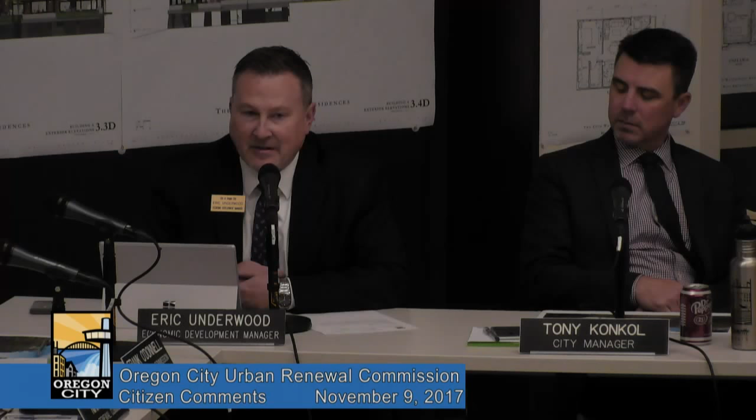All right, so Mr. Underwood? Okay, thank you, Chair Shaw. A new proposal for Phase 2 of the Cove project was submitted by the project developers to the Urban Renewal Commission in August of 2017. Upon the commission's initial review of the proposal, there were some additional questions that needed to be asked, and the commission directed staff to invite the project developers to give a detailed presentation. As per that direction, the project developers will be giving that presentation here tonight and will be available to answer any questions you might have. So with that, I would turn it over to them at this point.

All right, so we have a spokesperson for the project this evening. Name and where you're from, please. My name is Colin Kehoe, I'm with the development team, Hudson. Just want to thank you, commissioners, for giving us the opportunity to present our vision, our concept for Phase 2 of the Cove. City of residence for the record, please. Vancouver, Canada. All right, thank you.

Our basic intent is to provide quality rental apartments, which are in high demand in the market right now. These will be supported by a public plaza, a public esplanade, which is connected to a network of walking and bicycle trails. In addition, there'll be a public amphitheater in the North Park. There's a couple of things I wanted to say here. There'll be a broad range of units, including live-work units. They're all going to have one component which is secure underground parking, and all the buildings will have elevator access, secure again.

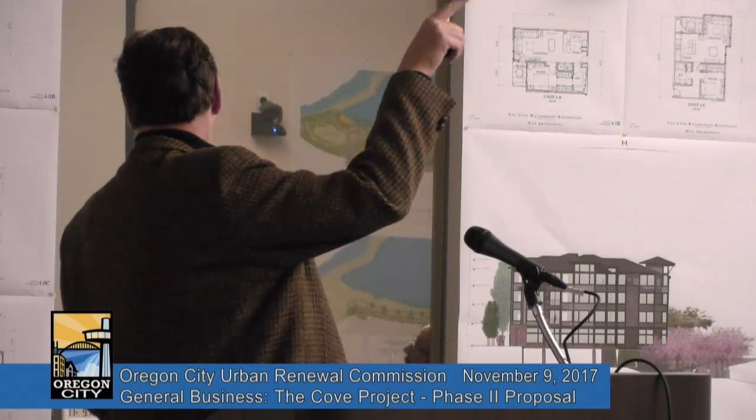Remember in the 60s, watching Star Trek, they would have those little panels that they would do stuff on. Do we need these lights left on? Is that good? Okay, no, we're fine. I'm fine. All right, good. Yep, okay, I don't have to take notes.

The Cove Waterfront Residences - we're at a point where we haven't really named the project or the buildings, so we've got some really exciting building names like A North, A South, B North, and B South. But I assure you that working with Graystar and the development team, some very interesting names will come up as we move forward. Maybe you could run that as a school project. We could, yeah, we could do a survey.

So this is our overall master plan for the project site. I think you're familiar with it. The phase 1 project here is under construction now. We're also the architects for that. We've been working with Grand Peaks Properties on that project - 244 units.

The first buildings are getting framed up to the roof now, and they'll be coming online next summer. You may wonder, gosh, 244 units is a lot—is it too much to do another almost 400 units next door?

These projects are differentiated. As Scott mentioned, the garden apartments are walk-ups with exterior stairs. These units are similar in size, some smaller, some bigger, but we have elevators, underground parking, and other amenities that phase 1 doesn't have.

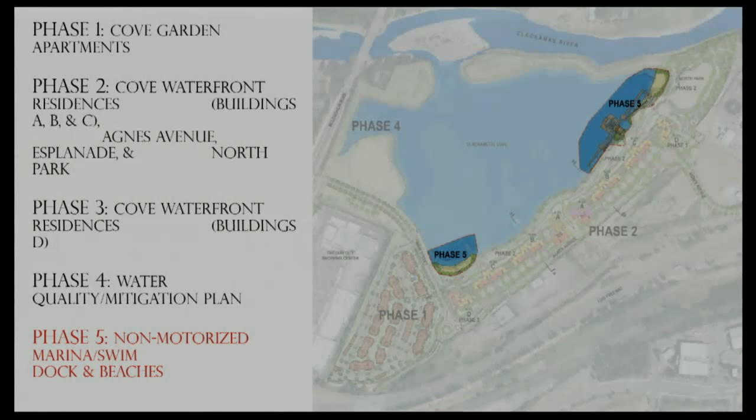Finally, phase 5 is at the north and south ends of the waterfront. We've dubbed there's a water sports center at the north end adjacent to the North Park. There are existing pilings in the water, and I think we can build the proposed docks with only a handful of new pilings, using the existing ones. There would be an observation platform—there's a big cluster of elevated pilings, so we proposed an observation platform a little above the Esplanade.

At the North Park, there's already an area excavated down just above mean high water, elevation 18 feet. To balance the cut and fill on the site, that'll be excavated a bit more, creating what we're calling the North Beach as part of phase 5—it'll be graded so there's a sandy beach going down into the water, which we understand is good for fish habitat.

At the south end of the site, there's a similar area we'll be excavating. One of the challenges on this site is balancing the floodplain—for every yard of dirt we bring in to fill in Agnes or fill in the parking lots in front of the building, we have to dig a hole just that big.

In earlier schemes, the plan was that any excess hole we couldn't dig on our site, we'd dig over on the Phase 4 site, as part of the water mitigation plan. But that creates phasing challenges—right now there's a parking lot there, and if we have to dig a big hole, we can't leave that temporary parking. So we've come up with a plan where we can build more parking there and leave it temporarily, then expand it during Phase 4.

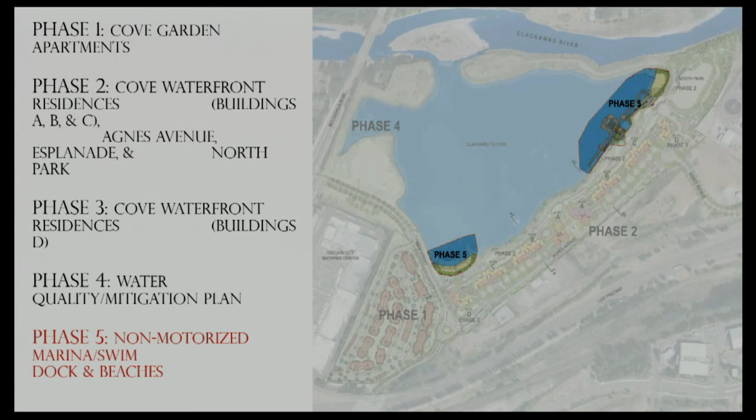And part of that is digging some more on this corner, which creates another beach opportunity, which we're dubbing South Beach. So now we have Miami covered, we've got North Beach and South Beach.

There'll be accessible pathways that lead down to these beaches that are flat enough, so you don't need handrails. They'll be handicap accessible, with sand that goes down into the water. Right now there's a path the triathletes use to get in and out, but it's not accessible and it's not the greatest. We're hoping there'll be kayaks, paddle boards, and other non-motorized watercraft using the water.

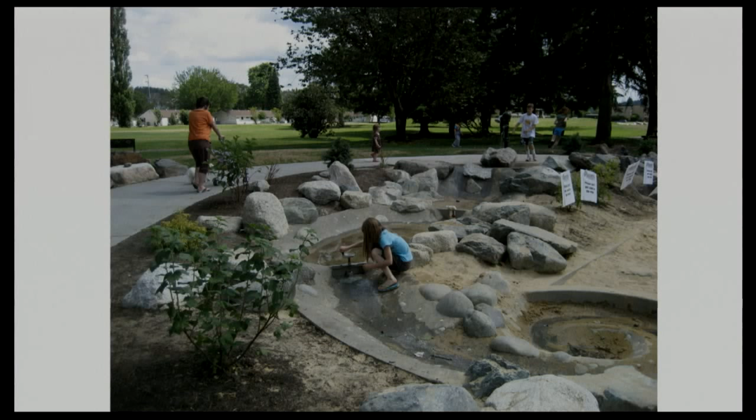There may also be, a very Portland thing, natural playgrounds. Without spending too much money, you can pile up some rocks and logs and things and end up with a really cool place for kids to play outside, and it might include a dry creek bed for the kids to play in, that sort of thing.

This would all be part of Phase 5. We're not doing it as part of Phase 2 because it gets into the water, and the permitting associated with it can be very difficult and time consuming, and we can't have that as a potential obstacle to moving forward with construction of Phase 2.

So here we are with the master plan, the big long master plan that was on the wall, that's about a half-mile long along the cove. We will enter from Main Street, either from Highway 99E or under the overpass here. This is where that curved wall with the sign will be, here.

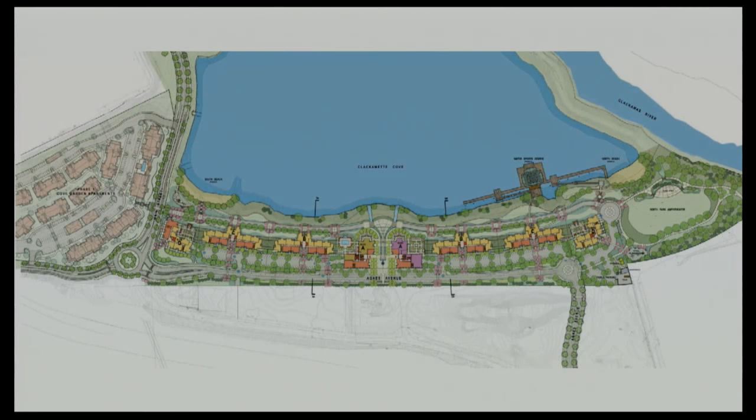The earlier designs really didn't have a concept figured out for the middle part of the site. As you may recall, there was a proposal to do commercial development in the middle part of the site, and there was also an agreement with Tri-Cities for a long-term lease for parking on the other side of Agnes. Well, one thing that's happened is Tri-Cities reconsidered that long-term lease, and they'll only do a 20-year lease, which just isn't a long enough commitment to allow for financing for a commercial project.

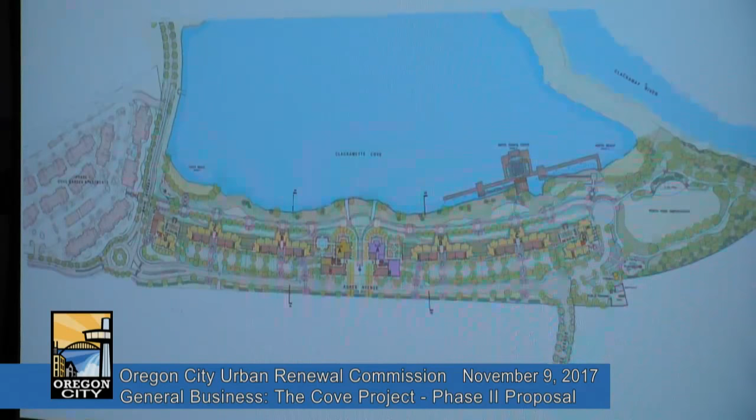So the development team has been forced to reassess doing just a commercial-only thing in the center here. And I think what we've come up with will be a wonderful amenity for the site. It will include restaurants, the outdoor plaza we talked about before, some retail—6,000, 7,000, 8,000 square feet—as well as community center facilities for the project itself.

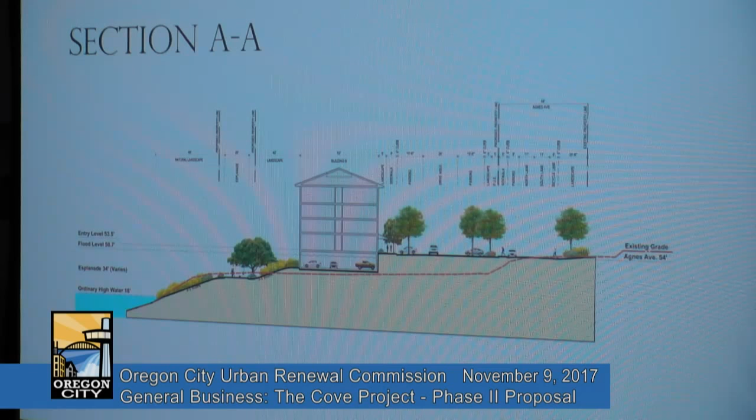So we talked before about the cut and fill balance, and Colin talked about having the garage underneath the buildings. You may recall that 7 or 8 years ago there was a plan that had garages under the buildings, and it didn't work out, ultimately because it was so much more expensive to build than having parking on grade.

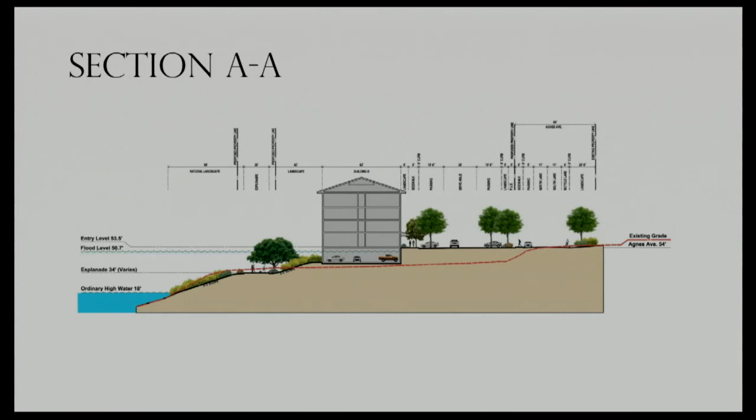So there were a number of plans put forward and reviewed and approved through the city that had parking on grade, in between Agnes and the buildings. From an architecture and planning point of view, that may be less expensive, but you end up with a sea of parking right at the front door of your building, and it's not really very nice.

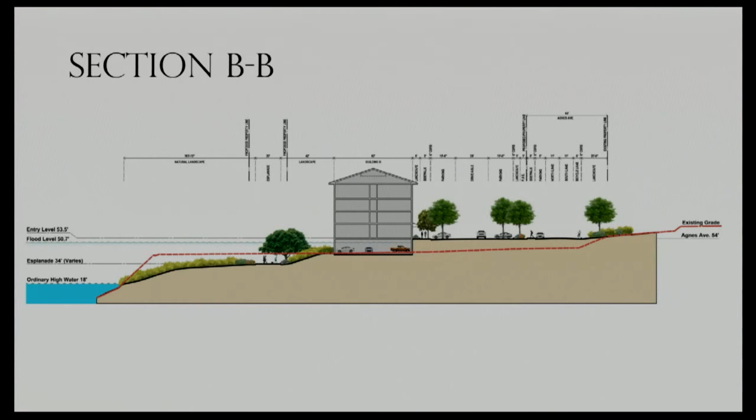So the development team, really led by Hudson Holdings from Vancouver, has pushed very hard and really tried to figure out a way to make this underground parking work. So what is making it possible to do this? It's still very expensive, but the red line represents the approximate existing grade out at the site.

And the black line is the proposed grade. So as you see here, conceptually, what we're doing is bringing out the heavy equipment, digging dirt here, and moving it over here.

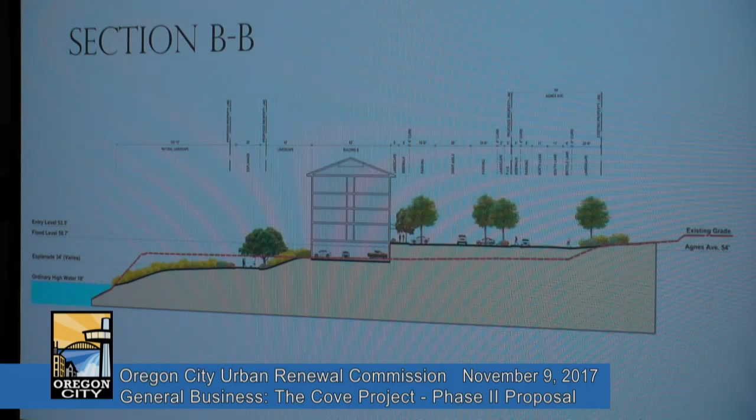If we didn't have parking under the building, we would either have to fill in the additional site here to do foundations on grade, or else we'd have a big empty crawl space. So that's really one of the keys to this plan: the underground parking.

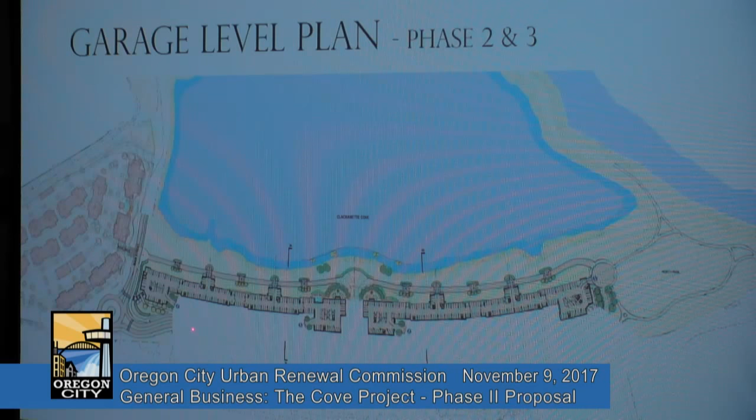The way the parking works, the site's divided into a north section and a south section. Each section has two entrance points to the garages, an entrance and exit here and here. There's a circular, one-way loop at either end of either garage, so if you get in and go to one end, you can turn around and go back, or go out the entrance. So we have these 4 entrance points.

I'll show you how that works on the site plan. Three of them come through the surface parking lot directly from Agnes, and the fourth enters from the turnaround circle, the fire truck turnaround circle that's down at the North Park at the north end here.

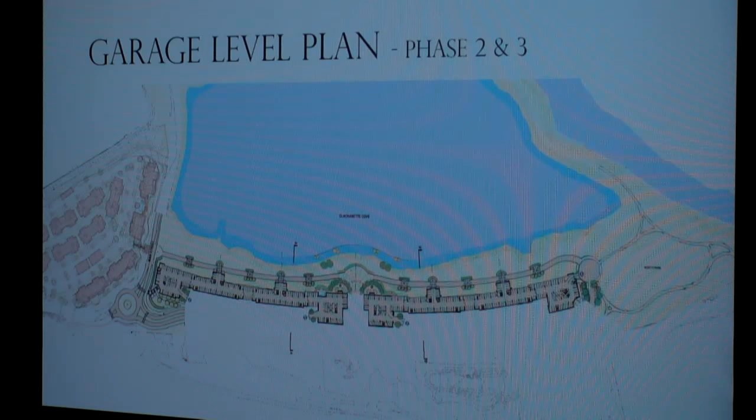There's just slightly less than 400 units proposed here, and the parking here is a little over 400 units. So there'll be enough parking to have an assigned parking stall for each unit, directly under the building you're living in, so you won't have to walk very far to get to your elevator to go upstairs.

At the center of the project, the two buildings we're calling the A North and A South building - this is A South. They front onto Agnes Avenue, which is down here.

One thing we've done that's a little different than the prior designs is we've proposed street parking on Agnes. If you're familiar with the Lakeview Village project in Lake Oswego, they have angled parking in front of what used to be Zeppo's and some of the restaurants there. That's the vibe we're after here.

There's street parking along Agnes Avenue. There'll be enough parking here, plus a little parallel parking on the other side, to adequately serve the two big restaurants we have here, plus the retail shops.

The community center is really the hub of amenities for the residents here, and I think there'll be a small leasing office adjacent to it.

The community center will have outdoor seating, some of it covered, fire tables and so forth, a pool with a pool deck for sun loungers, more outdoor covered seating as part of the pool deck, an outdoor grill, a fitness center, showers and bathrooms, and that sort of thing.

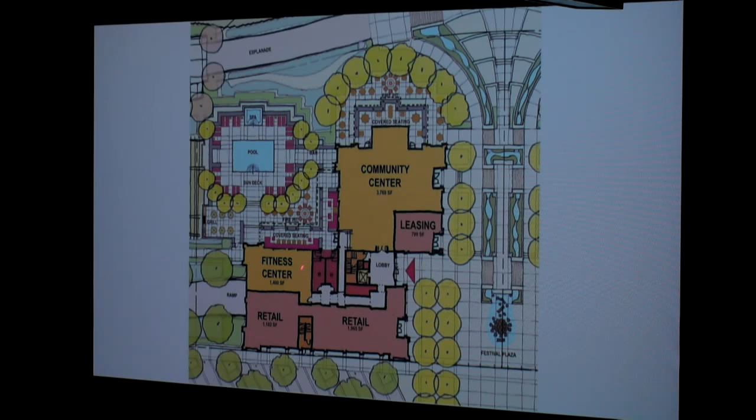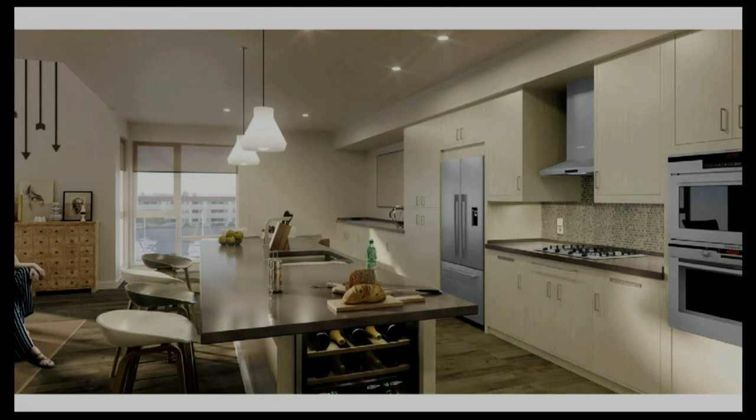Here's an example of a kitchen that's part of a community center - if you're having a 50th birthday party or something, you can reserve the community center and throw your party there.

Here's an example of one of the apartment rooms, the kind of vibe we're hoping to accomplish with the apartments.

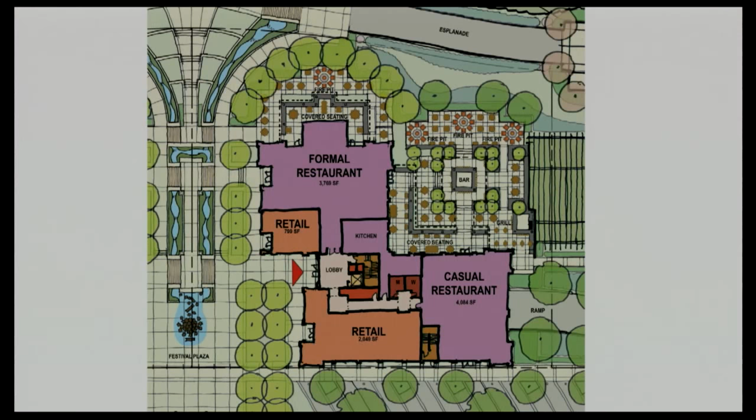On the other side of the plaza, we have the A North building, which has some ground level retail that faces the plaza and the parking here.

Then there are two restaurants. There's about a 3,700 square foot formal restaurant with a sizable outdoor patio with wonderful views out to the cove, and a more casual restaurant of about the same size with covered seating, an outdoor bar that could be covered, and an outdoor grill area that could be covered. We think this might be perhaps a brew pub or something like that.

We haven't identified restaurant operators yet. We're talking to some, but it's possible this might be the same operator that has two different kinds of restaurants serving two different kinds of markets here.

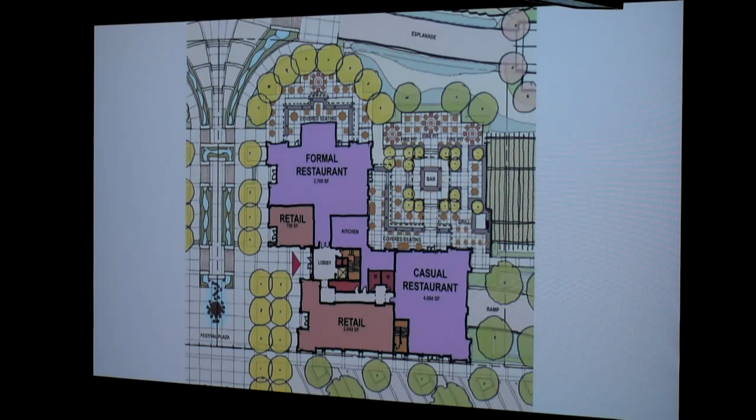That's the A buildings at the center. Let me see what else. Here's an example, over at Lakeview Village, some of the outdoor seating next to Lakeview Village. This is kind of the vibe we're after, overlooking the cove, with low landscaping and a gentle sloping down, and tables with inside seating elevated just a little higher so you can see out over the top.

Here's an example of sort of a modern outdoor deck overlooking the water. Here's an interior from a current unit similar to what we're talking about.

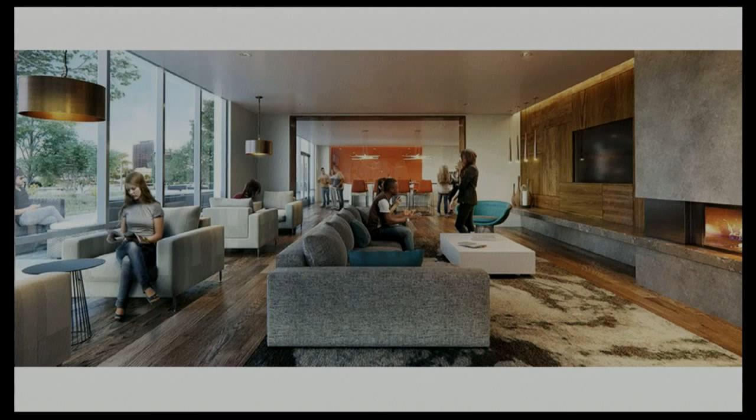This is actually the community center image here — it got shuffled into the wrong place. This is the kind of vibe we're thinking of for the community center, kind of a lounge where people can come and hang out. There'd be package delivery and mail here at the community center, so people would be coming and going and meeting their neighbors and so forth.

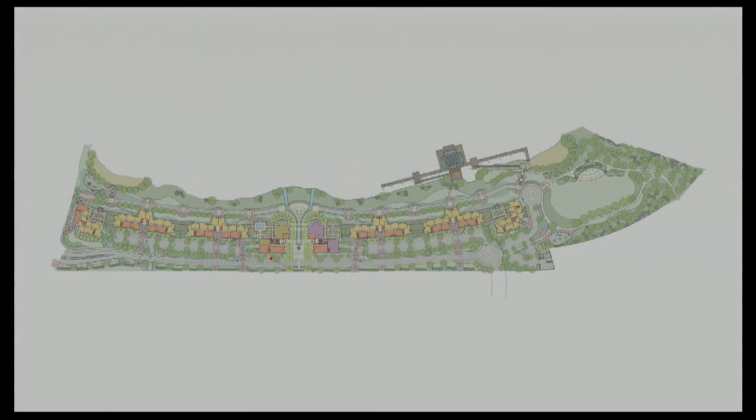Here's a residential kitchen. So here we are — I'm going to walk you through. We've got a series of about 15 or 20 renderings that we've done from a computer model for this. If you look on the image, I'll flash through an image like this for each one. It'll show you a little diagram indicating where this is, where the view is rendered from.

This first view is a view as you're driving in on Agnes Street just before you get to the plaza. On the left, there's the parallel parking. We've got some bicycles in a bicycle shop here. There'll be signage and so forth for the retail things. You just see the Festival Plaza here and the crosswalk that crosses over just beyond, and then the D North building beyond.

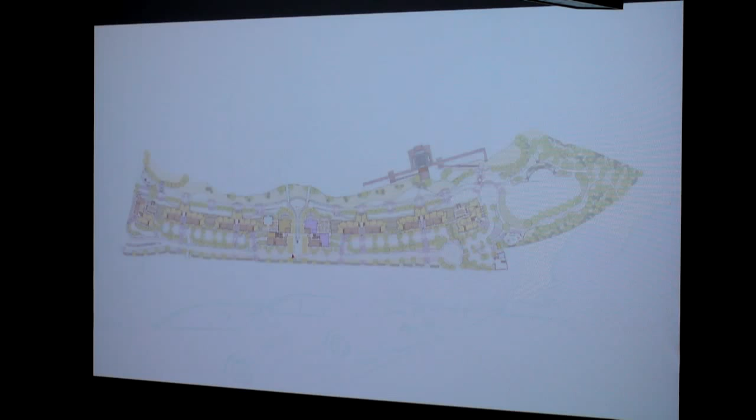The next shot is just moving down, just across from Festival Plaza, and we're looking at what we're calling the D North building. It's ground level retail and restaurants, and then three levels of units over the top.

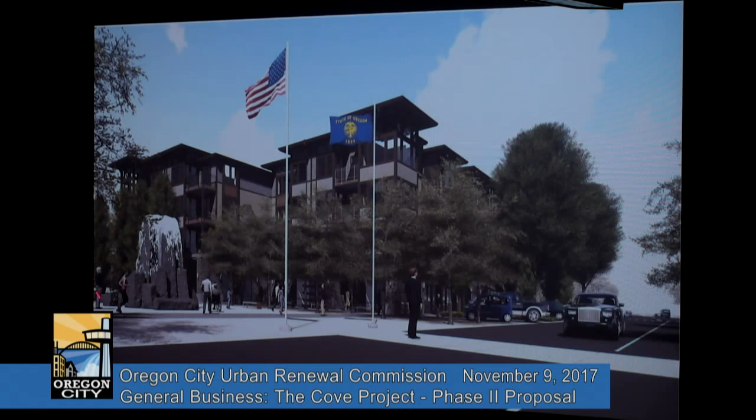This Festival Plaza features a prominent water feature. We don't know if it's going to be a big columnar granite thing or some other kind of sculptural thing — we think it wants to have some scale and be a robust kind of water feature. We've got a concept that has a water source happening in the center of the plaza that leads visually out to the cove, and I'll show you how that works.

The next view is more or less from the same spot, but turned to look more towards the plaza, so you get a sense for the scale of the plaza here. If you've been to the farmer's market in Lake Oswego, the plaza there is not so different in scale — this is maybe just a little bit smaller, but about the same.

We've got 80 feet between the buildings here and about 120 feet between the buildings here, and those proportions are very intentional in order to create spaces that don't feel too enclosing, that create the right kind of feel for the project. We have bosques of trees, a grid of trees on either side of the plaza, with decomposed granite underneath so that if you have events, you can set up your booths and so forth right on that.

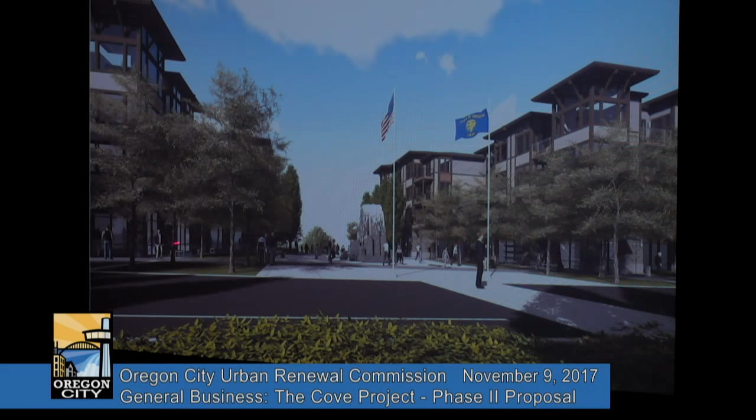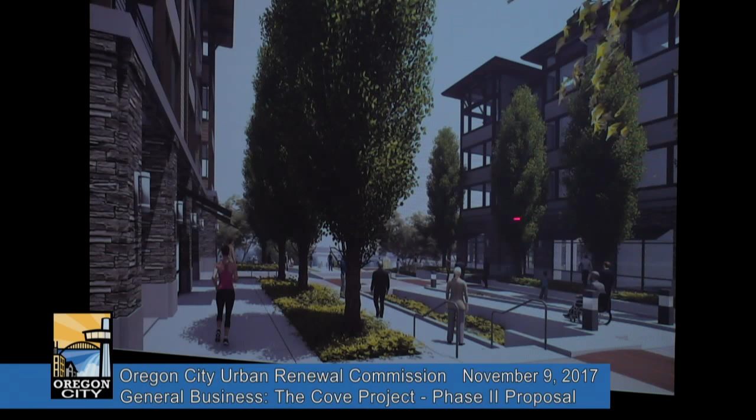You might have bocce ball set up or that sort of thing for the residents to use here. Moving in a little further into the plaza, we're about halfway in, and on the right we have a gently sloping ramp that goes down. There are two water features, one on either side of the ramp, with a water source that comes out from under what looks like a bridge, but it's really just concrete that has a pumping system that pumps the water out and it recirculates, either from the cove or internally.

We haven't worked out the details yet. So there are three steps down, and then some concrete seat walls here. During the day, this will be a wonderful place to sit and contemplate, maybe read a book or something.

You see this is the access down to the entrance to the community center on the left, and the entrance to the fine dining restaurant is on the right.

The next view is from more or less the same kind of location, a little bit more in the center, looking out. And the next view is looking back. We've gone down the plaza a little ways, so we're looking back towards Festival Plaza, just outside the entrance to the community center.

Here, the next view, we're looking directly across. This is the entrance to the fine dining, and you see the outdoor seating here for the fine dining restaurant, which is 2 or 3 steps down lower than the plaza elevation that we're at.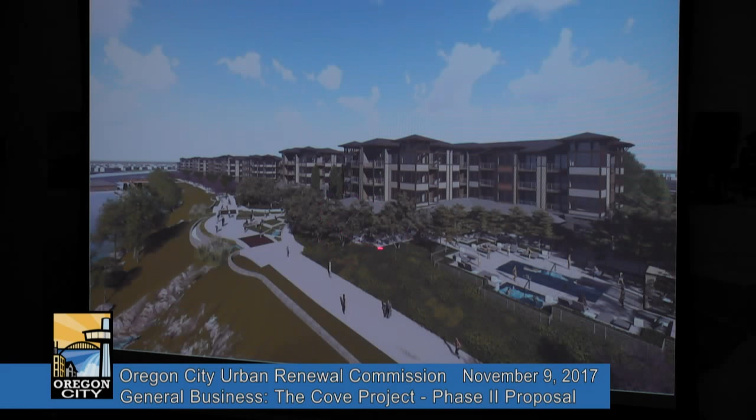Beyond is the outdoor seating and fire tables and so forth here. So I'll back up here and show you.

This location here is taken from a balcony at the end of the B South building looking over the pool plaza. The trees have been sized in such a way that they're low enough that you can see over them from the second story, but they're high enough to provide privacy for the people down on the pool. This is the outdoor grill area with tables and a grill that you can use in the evenings, if you want to come down and hang out with your buddies.

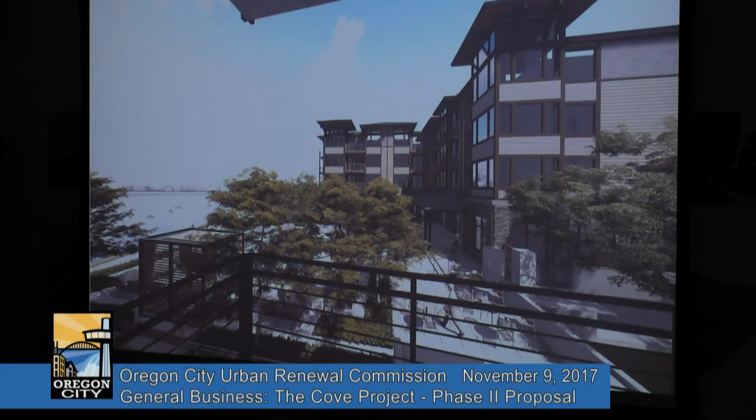So next. The next view, we've moved up just close to what we're calling the Amphitheater Plaza at the Esplanade. And so we're just right in front.

You see here, there's a gentle sidewalk that slopes up. This is flat enough that you don't have to have handrails. This is part of that water feature that starts in the center of Festival Plaza and passes under 2 or 3 bridges and then comes down and disappears under this bridge. This will either be recirculated, or if we can work out the details with fish and wildlife and so forth, it might be pumped from the cove all the way up and then all the way back down.

You notice there aren't handrails or guardrails. As long as we keep the grade within less than 2.5 feet down off the edge here, and we have a little curb so you can't run your walker or your wheelchair off the edge, we don't have to put guardrails. So we're trying to keep it open and avoid having kind of clunky guardrails.

So we're calling this the Amphitheater Plaza. You see there are 2 or 3 steps up in a seat wall here, and then another 2 or 3 steps in a seat wall, and another 2 or 3 steps in a seat wall. There's a concrete plaza here, which is big enough for if you had music or some kind of a little performance. You can have quite a few people sitting on the steps and enjoying something happening here.

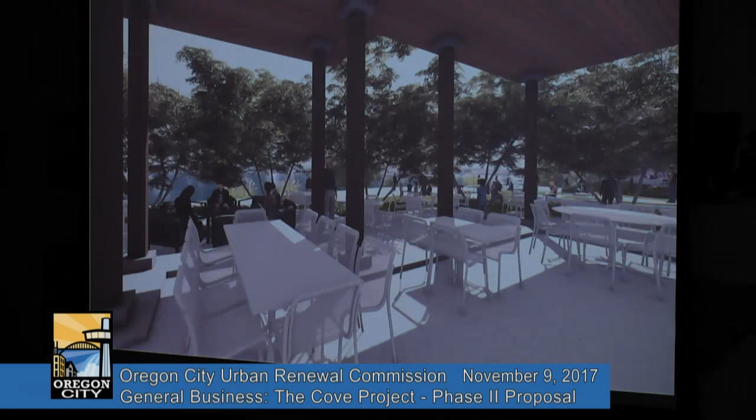So this is all part of what we think will be a wonderful public amenity that this project brings to the city. This is a view from where we're sitting in the covered area, actually just inside the community center, looking out over the covered seating here. In the computer model, we put all the furniture in, pulled into the tables, and then we couldn't get the people to sit in them.

So we've got people sitting around the fire table outside here, but we couldn't put people and dogs and things in here. But there will be heat lamps, so you can use it in the spring and the fall. And this would be a very similar sort of space to what happens in the restaurant on the other side.

So moving along, now we're standing kind of in the middle of the Amphitheater Plaza, right at the center of the site, and we're looking to the north. Here you can just pick up on the left the Phase 5 Water Sports Center, and you can just pick up the viewing platform. But you see this sweep of the Esplanade, which in some of the earlier designs curved around a little bit. We've put a very intentional, gentle curve, and so it slopes.

Here we're at about elevation 42 or so, and it slopes down at 4.8% to a little landing. At each landing it widens out, and there's some beautiful cherry trees. Then it slopes down a little bit more to the next landing, and it goes down to about elevation 34, which is where we need to be in order to grade the slope here and do the right cut and fill and so forth.

But we've provided shade trees on the right side to provide privacy from people and to make it feel right.

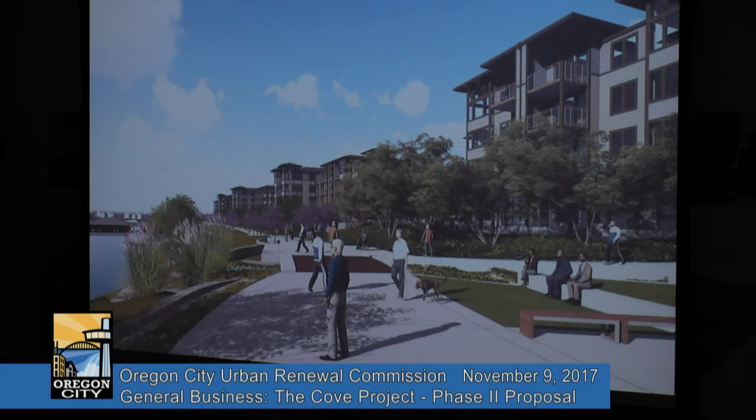So here you see on the right, this is the formal dining outdoor patio area, similar to what I showed you before. We'll move forward just a little bit down, so this is about halfway down to the next area. You can see now we're down 5 or 6 feet below where the dining area is. This is the outdoor restaurant patio for the more informal restaurant next to it.

And you see this is one of our B-C buildings, to the right. So these buildings, we've intentionally created corner windows in the corners of the units at the ends. And you go back to the next unit, there's also a corner window here. And if you go to the middle, there's also corner units. So these units have sweeping views, 180 degrees or nearly 180 degrees from the majority of the units. The way these buildings have been designed, they're corridors, so half the building is on the side away from the cove, and the other half is on the side towards the cove.

Wait, are you going to get into these, I know these are kind of live-work units? Mm-hmm. And you're going to get into that? I can show you the live-work units here in just a minute.

Okay, sure. So this building, I think, has 60 units in it. And out of those units, 75 or 77% of them have views out to the cove. So there's only a few units that are in the middle on the back that look out the other way. That actually provides a differentiation in the market. The water view units will be more expensive, so we'll have a mix of rental rates here, some more expensive and some less expensive.

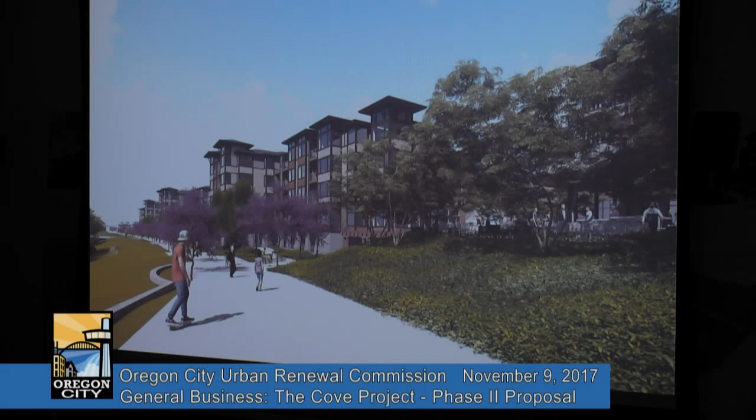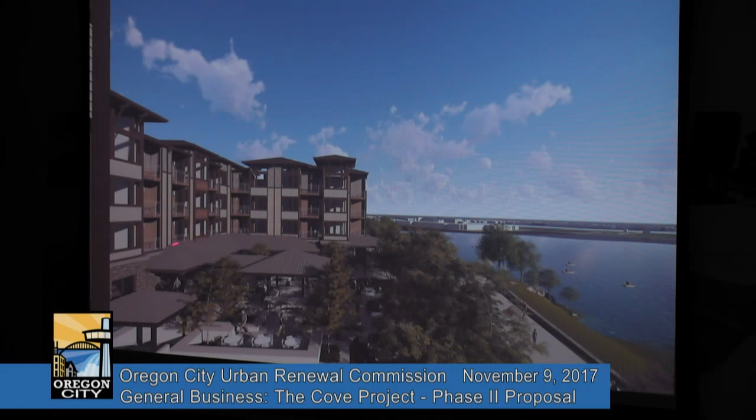So the next view that we have, we're actually in one of the corner windows at the end of this B North building looking back towards the restaurant plaza. The restaurant plaza has covered seating that wraps around the inside of the L of this A North building, but it also has a pavilion in the middle, which could be an outdoor bar with bar seating all the way around and heat lamps. There's another little pavilion here, which could be an outdoor cooking area for grilling. And if you look over here, it ramps down gently, and there are 2 or 3 fire tables and tables that have views under the overhanging branches out to the cove.

So the next view is just moved over a little bit. You're on the balcony in the same unit from a slightly different vantage point looking down. And then if we jump back over to the end of the A North building, there's a balcony here. This unit is not on the waterfront.

It's back on the side of the cove. Here's the view out of the balcony of that unit. So you don't have a 360-degree view of the cove, but you do get a little peekaboo view of it.

This will give you a good feel for the on-site surface parking here. It's been designed in a very regular pattern with 8 cars surrounded by trees on all sides. The live-work units that Brian mentioned are on this part of the B and C buildings on either side, with 2 units on either side of the center of the building. Here's a view of the C North building from the parking lot.

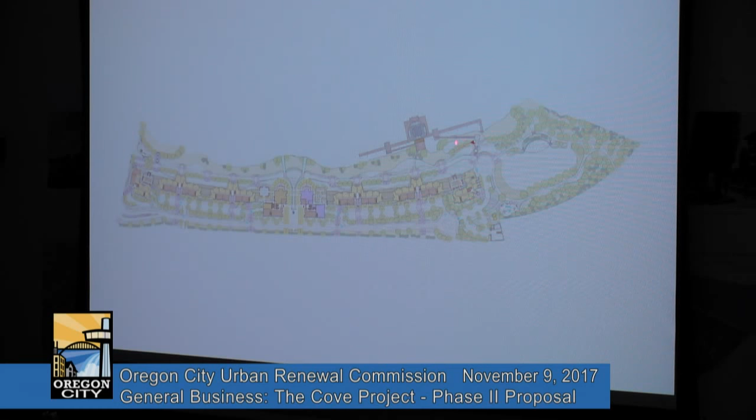So here we are, back to the north of the project, just right near the North Park, looking back, and we're at an elevated position.

So you see here, the parking wraps around the D North building and slopes down to the turnaround here. This is where the vehicular entrance enters and exits the garage. Then there's a pedestrian entrance that goes in and out of the garage, and another entrance that goes into the stair leading up to the building.

And you see in the center here, this is a little covered pavilion with outdoor gas heaters where you could have a cocktail or eat your dinner in the evenings.

Here we're sloping from about 40 down to 32 and then back up in the middle. This is the Phase 5 trail that will lead down to the North Beach, a nice, gentle, less than 5% slope kind of trail.

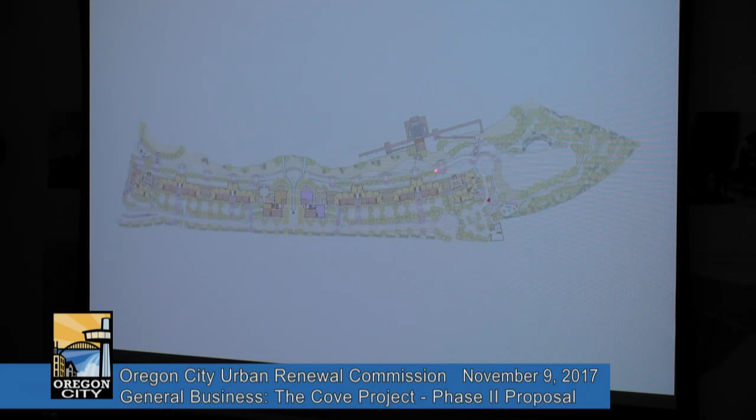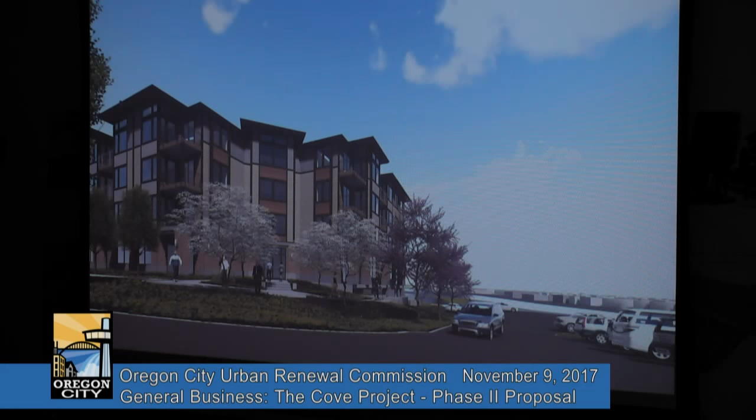So we're getting close to the end here. This view is at the corner of the North Park, looking at the entrance to the D North building. There's actually a ramp, a slope sidewalk, and a crosswalk that leads right across here that our modelers didn't quite get into the computer model yet.

So that's a quick tour of the proposed design for the Cove Waterfront Phase 2 and 3. I'd be happy to answer any questions.

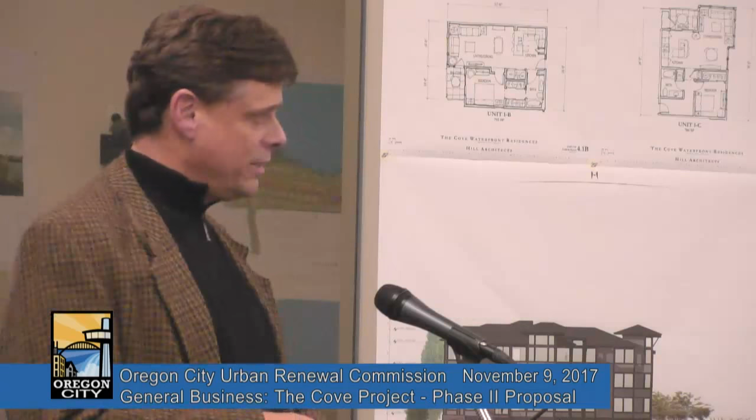I have two questions. One is on the live-work units: are they single-story or 2 stories? We've explored both options, and it could be either way. We're leaning towards the 1-story option to keep it in flats all on the same level. It's simpler to build, and there seems to be a preference. We'll work with Greystar to come up with a unit that's desirable and leasable in the marketplace. And how many live-work units will you have?

So the live-work units are on the plan here, they're the orange units: 2 here, 2 here, 2 here, 2 here, 2, 2, 2. The way the vertical housing tax credit works here is a bit of an anomaly — if a project fronts on more than one street, then 100% of the ground level units in the building facing one of those streets has to be live-work. So we've got an anomaly where this fronts on 2 streets, but it doesn't make sense to do 100% live-work on Agnes. So we've put live-work on these 2 units, and we've actually come up with a pretty cool idea if you look at the plan. This is in the floodplain.

The street here is down at about elevation 34, and the floodplain's at 50.8. But there's a nice set of formal stairs leading up to the front door, and then an elevated walkway, patio — we think it's concrete — that wraps around the building and leads to stairs that go back down to the Esplanade. So somebody on the Esplanade can go right up the stairs, or go to the garage and up the elevator, or go up the stairs. There's also an accessible way to get up there — it ramps up here, and you can walk right in on grade or go in with a wheelchair. So it's 2, 4, 6, 8, 10, 12, 14, 16, 18 units.

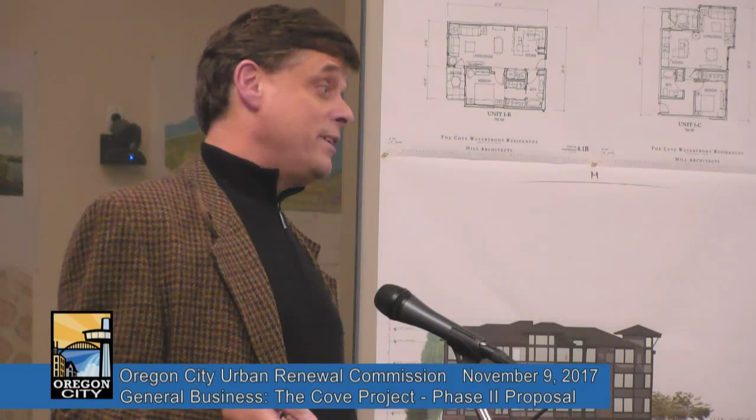We actually think we've put in quite a bit, and I'd let Steve Shapiro, our landscape architect, speak to that, but the landscaping along the waterfront — we've been working like crazy to get some nice visualizations of the project to you. We haven't drawn in, but if you look at this map, the area of this color of green all along here and here and here is all intended to be habitat with native species. If you know the native species, it would be things like spirea, vine maples, ashes, and beeches and so forth — a combination, whoops, we're losing a drawing — some big leaf maples in clusters, maybe some evergreens as well.

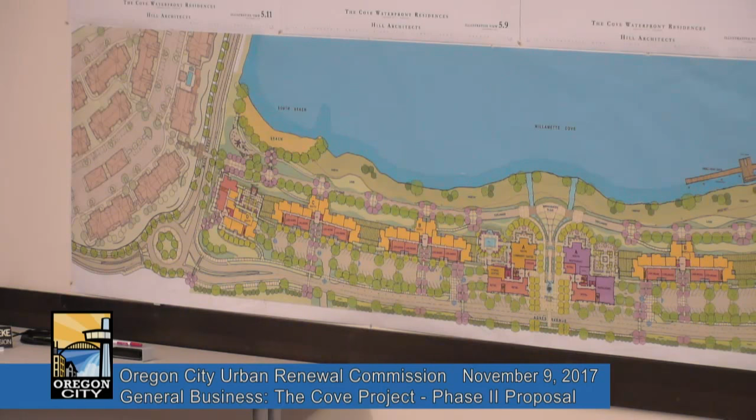So all of that will be native plants, native habitat and so forth, including all along the Clackamas River here and a big area here. We're working with Pacific Habitat Services to quantify the impacts. We do need to dig out along the bank here, and the bank is infested with cottonwoods, which are widowmakers—the branches just fall off at random. So I think the team as a whole feels it's going to be better to get the cottonwoods out.

Replace them with healthy native species that will grow into really high quality habitat. On the upland part that's away from the waterfront, we actually have lots of trees and landscaping.

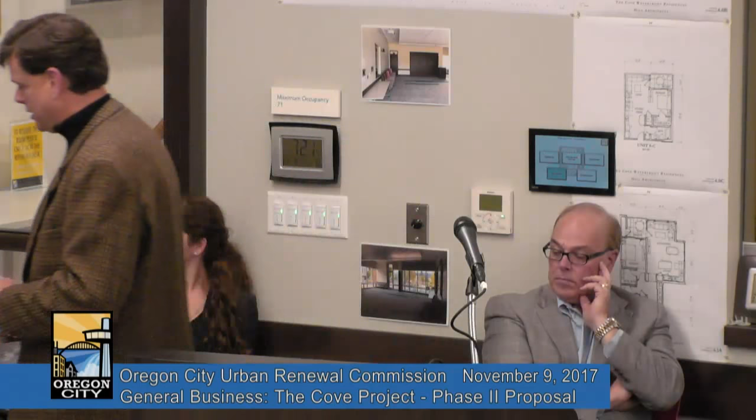Sure, I'll give it a try. Get out our crystal ball. Yeah, 2 years. By the way, I didn't give my name and residence, Scott Watson. I'm with Greystar. I live in Lake Oswego.

Rental rates for the project are higher than what exists now for an average renter in Oregon City. It's probably going to be something in the order of $2.50 to $2.60 minimum a square foot by the time we get through this project. So what does that come to for a one-bedroom? Probably going to start in the high teens, $1,900 to $2,000 a month for a one-bedroom, I would expect. And a three-bedroom, this is all subject to what we ultimately get here, could easily be above the threes. Is that fair to say? Yes.

Questions? That's it, thanks. You bet.

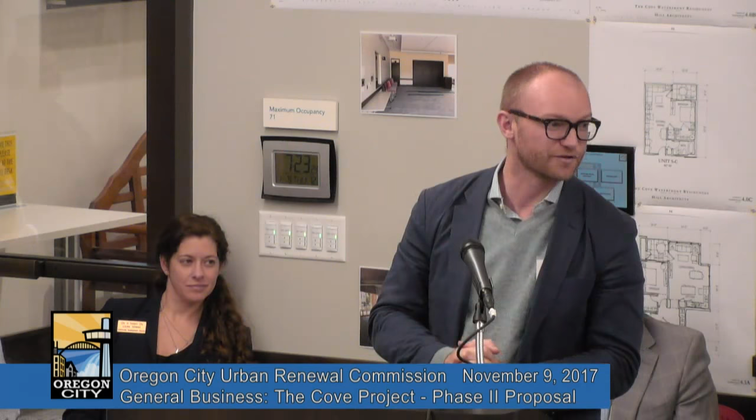Well, just to advance that cause a little bit, having worked in the electrical industry for 25 years, I've worked on probably 50 Deacon projects, and we're extremely fortunate to have Deacon be part of this project team. Probably one of the 5 or 6 premier builders in the state of Oregon. Okay, so, Steve, do you want to say anything? David, I would love to.

Name and residence, city, please. Yeah, my name is Steve Deacon. I'm the CEO of Deacon Construction.

I live in Portland, and we've been in business here since 1981. We currently have offices on the West Coast - in Seattle, Sacramento, Pleasanton, and Irvine. I was a little late getting here today because I flew back from our Irvine office this afternoon.

But we're really pleased to have a chance to be part of this project, both as a general contractor and it looks like as a co-developer with Hudson, which is exciting to us on both fronts. This is our home - we've been here in business for 36 years, and we always do our best to try to enhance whatever project we're involved with. So we appreciate the opportunity on both parts.

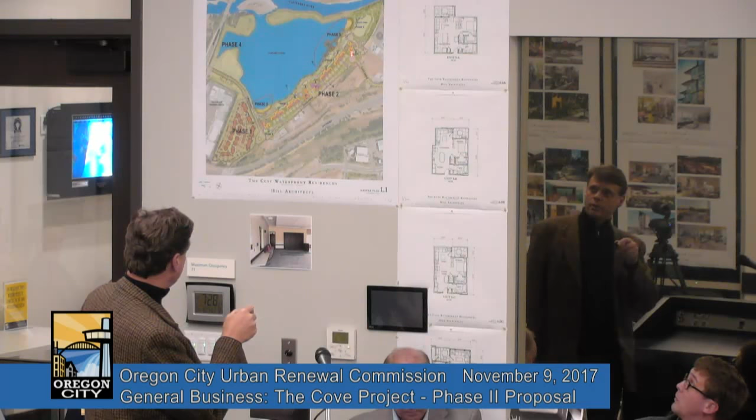ODOT doesn't want it to connect through right now. I don't know how that gets solved long term. But there'll be bollards here and bollards there, and I think what's been discussed in the prior versions is that you do sort of a half-street section here so that it's pedestrians and bikes.

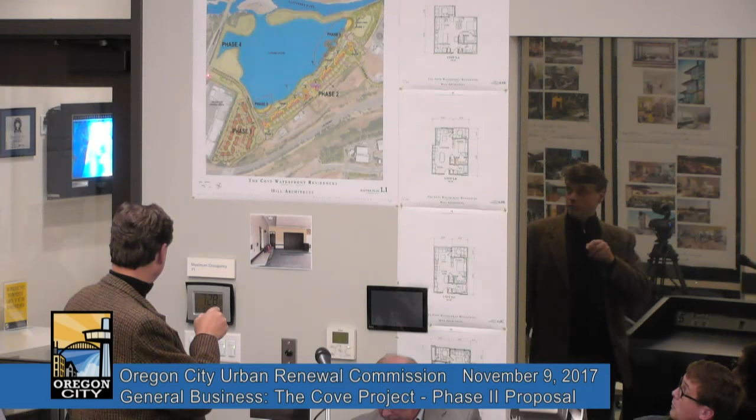But from a flood point of view, Main Street's flooded, and Phase 1 has a backdoor access, exit out the corner here that gets above the flood zone, so they have an exit out. We're designing this so that Agnes, from the time you get here, is entirely above the 100-year flood, and the Agnes extension is above the 100-year flood, so that anybody here, even during the '96 flood, you can come and go, get out. So you could still use Agnes in an emergency situation.

Absolutely. That was part of the deal with ODOT when we started this process - no access from the Tri-City side into Agnes because of the current configuration of the 205, 213 interchange. So it was agreed that it would be utilized for bike/ped and then an emergency access in those situations of a big water event.

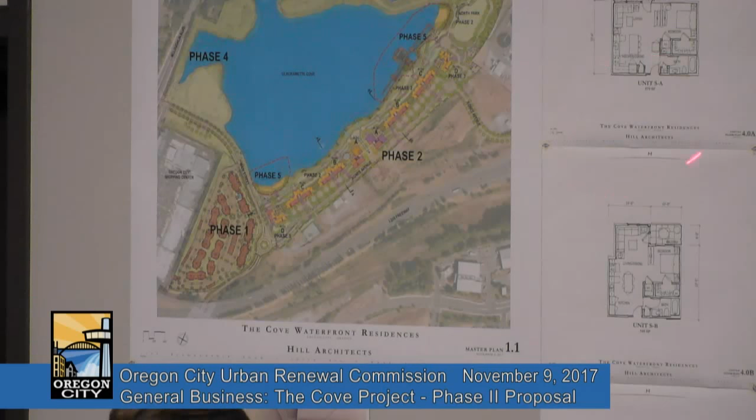There's talk about the feds spending money redoing 205, other lanes on the Abernethy Bridge, et cetera. Is there anything in the long-term planning with ODOT for fixes for any of that? No, we don't have funding yet for a new interchange at 213 and 205. We addressed some of the interchange, the jug handle, but not off of the interstate itself yet.

So probably lastly, you've got some retail space there. Do you envision who would be in that kind of area down in this Cove, or what do you think that would be? Well, one of my guys spent an hour or two on one of these renderings of the plaza. I'm not sure which one. There's a cool sign that says Oregon City Kayaks or something with a bunch of kayaks in the window, and one of the other shops had a whole bunch of bicycles. I think we know some business people in those businesses that would love to have an opportunity out in this kind of area.

I think with this number of units, probably a small sandwich shop or a deli would do very well. Convenience foods, pick up your quart of milk, yogurt, or kombucha, whatever it is you want. We don't have a huge amount of commercial space here, but we think there'll be good uses for it. There's going to be probably 1,000 people living in that area. I think a market down there would be good too.

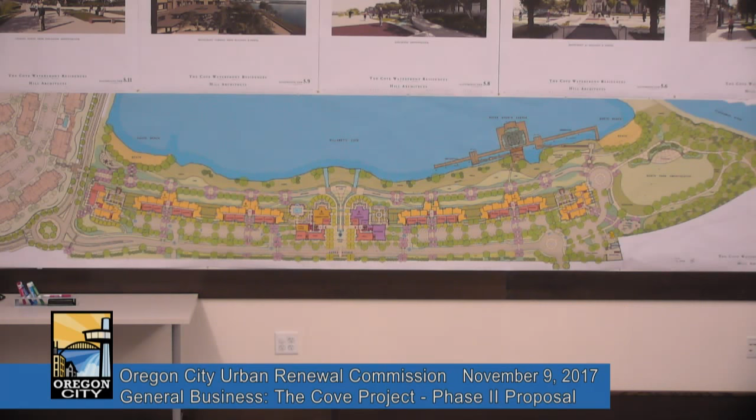And my second question is, what happens in a flood event with the possible cars underneath the buildings? Is there an emergency evacuation plan? Is that a property management responsibility?

The property management group will have a policy related to this. I assume a lot of you have been here since '96, I was here in '96 too. We knew three or four days ahead that the flood was coming, and anybody who cared to had an opportunity to pack their stuff up and get it to safe ground. So if you're here, management's going to give fair warning for a flood like that, and you can get your car out of the garage. There'll probably be storage down here for kayaks, paddleboards, and bikes, so there'll be a plan in place to get those to safe ground.

So the existing sheriff's building down there, is that going to be the Sea Scouts? Are we going to work on that? Yeah, we would love to include them in this process and figure out a way.

We've put out the big vision here. This dock is 600 feet long, it doesn't have to be that big. But having a cool swim dock and a boating dock, and maybe some kind of future water sports activity center where you don't have to schlep your kayak up and down, with places to store things down there. I could see this being a little sailing club. Maybe there's a way to make that happen. This is a better place to sail than where they have the sailing clubs along the Willamette, or even over in the Columbia, a lot of places.